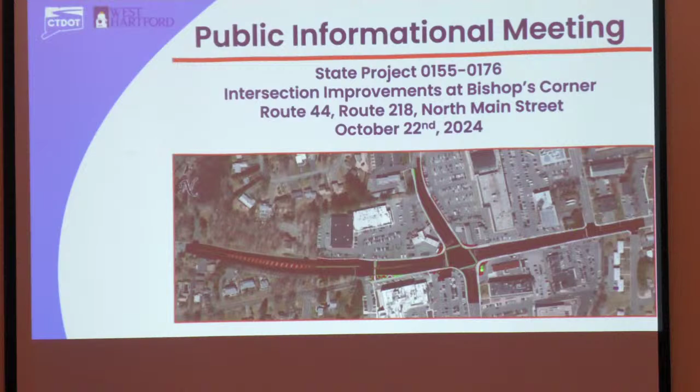Thanks for coming out this evening, everybody, to tonight's presentation for State Project 155-176, intersection improvements at Bishop's Corner. Excuse the adjustment here.

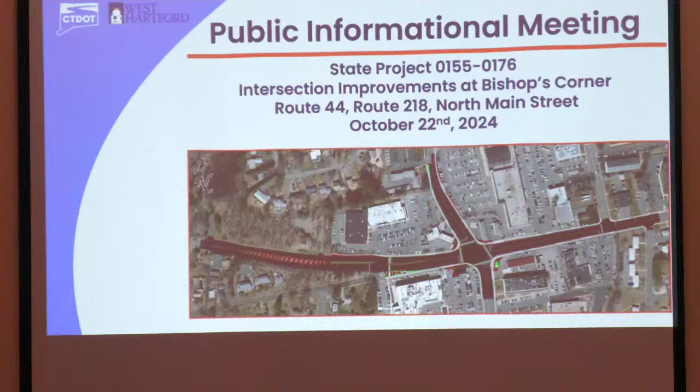My name is Andrew Esposito, I'm the project engineer for this job. With me tonight I have the project manager, Joe Arsenal, the project designer, Nick Willey, from our rights-of-way department, Matt Janatopoulos, from our traffic department I have Colin Bomber, Adler Phils, and Jinhao He, and from our landscape design unit I have Matt Berry back there as well. Maybe get an opportunity to talk with us all before this presentation, and we'll also have time to talk after.

Before I dive into the project presentation, get into the background and the proposed improvements, I just want to touch on the Connecticut Department of Transportation's Title VI Notice to the Public. The information you see on the screen is available in handouts in the back. We also have all this information available on our project website. The handouts have information on how to get to our project website, and I'll leave that information up on the screen again at the end of the presentation.

So, project location: we're at Bishop's Corner, the intersection of Route 44, Route 218, and North Main Street. North Main Street, south of the intersection, is a local road. You can also see Haynes Road that intersects North Main Street to the south, Flag Road and Skyview Drive that intersect Route 44, and Starkel, which intersects 44 and wraps around to 218.

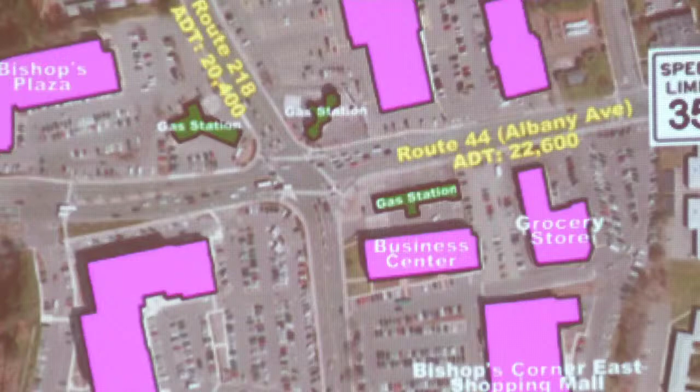This area is obviously very well developed. Three of the four corners of the intersection have gas stations on them, highlighted here in green. The buildings highlighted in purple are all the commercial and retail space with all the parking surrounding them. Each leg of the intersection has a posted speed limit of 35 miles an hour and an average daily traffic between 20,000 and 25,000 vehicles per day.

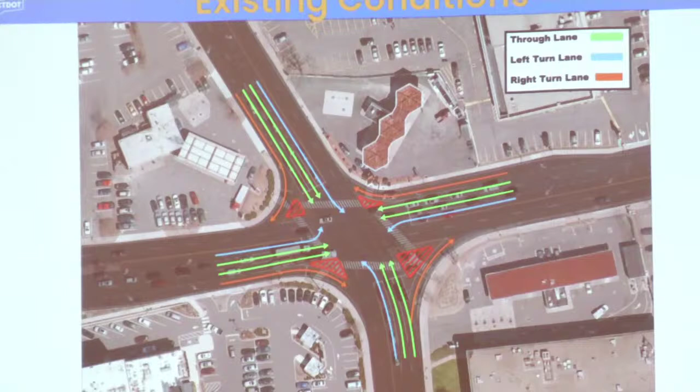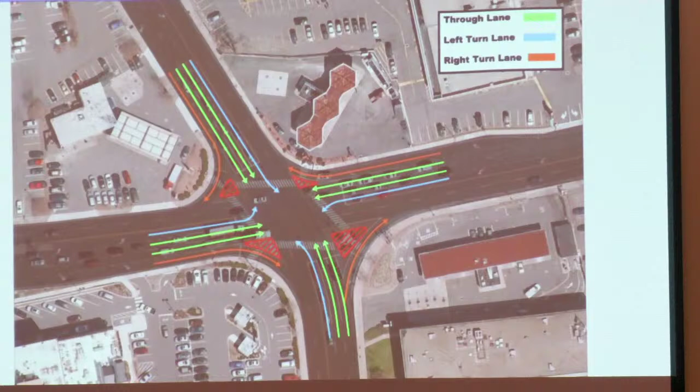So this is the existing lane configuration at the intersection. Each leg of the intersection has 2 through lanes, a dedicated left turn lane, and these channelized right turn lanes. Because we have these channelized right turn lanes, we have all these islands outlined here in red, which are a pretty big component for improving safety at this intersection.

Vehicles who use the channelized rights tend to use them at high speeds, with their main focus being looking at the upstream traffic or upstream vehicles that they need to yield to, which may leave pedestrians waiting to cross to or from these islands unnoticed.

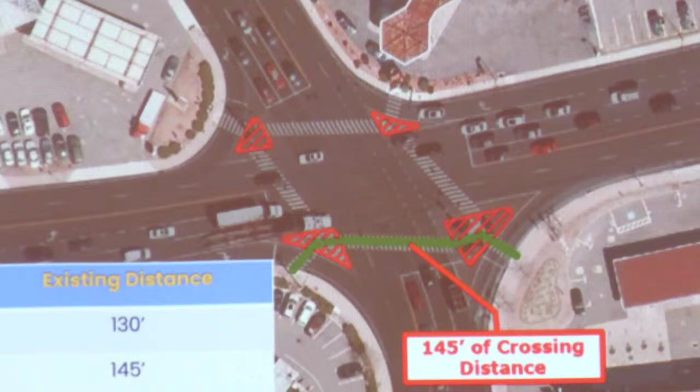So the signal at the intersection has a concurrent pedestrian crossing phase, and all that means is pedestrians, when they get their signal to cross, it's in the same direction and at the same time as vehicles traveling through the intersection. The push buttons to activate all of these signals are all located within these pedestrian islands. This kind of creates a lengthy multi-step crossing to get from one side of the road to the other.

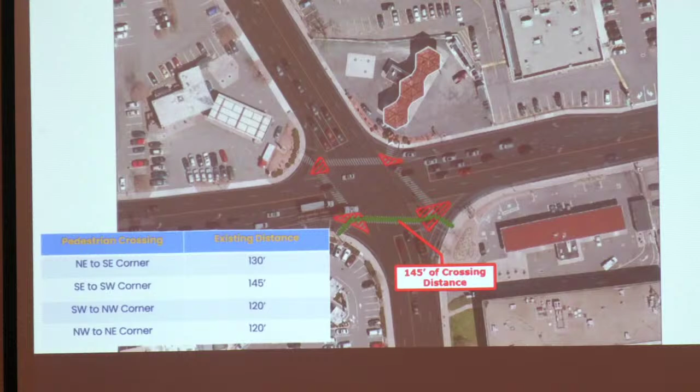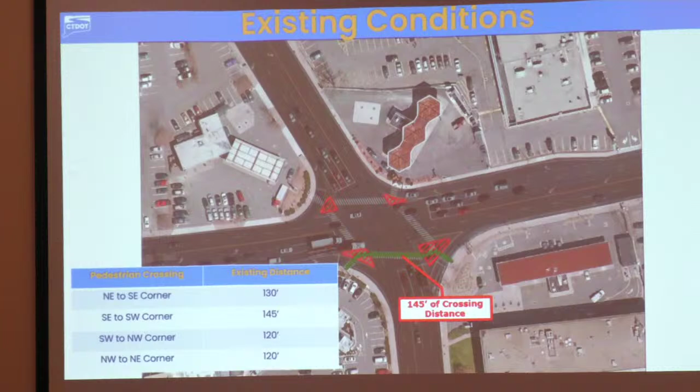The town has received complaints from pedestrians who use the intersection saying it's difficult and confusing, and vehicles often don't yield to them as they try to cross to these pedestrian islands. They've also complained about the condition of the islands. Pedestrians must wait on them surrounded by vehicles until they get their signal to walk.

These islands are subject to get hit by large turning vehicles. Not all the ramps are ADA compliant, and 2 of the 4 islands are mostly made up of asphalt, kind of causing them to blend in with the surrounding roadway.

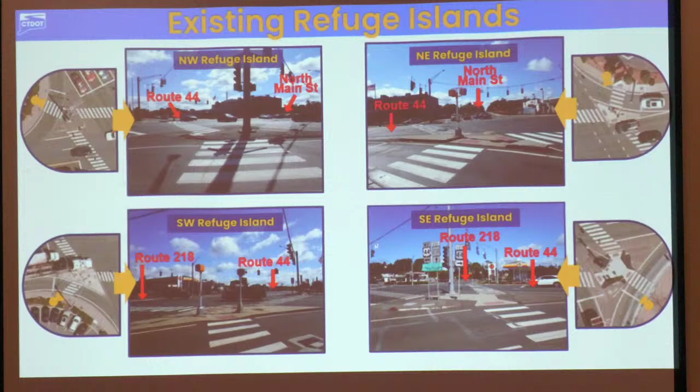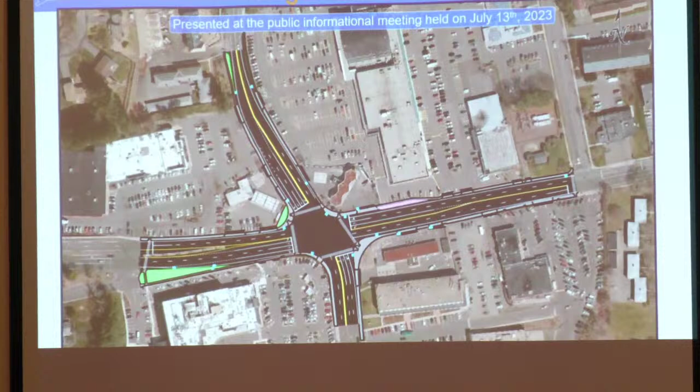So this was our original alternative concept and project limits for removing the channelized right turn lanes, with the goal being to improve pedestrian and intersection operations. By removing these pedestrian islands, we were able to normalize and shorten the total pedestrian crossing from one side of the road to the other.

We were also, by removing these channelized rights on the southbound leg and the eastbound leg, replacing the channelized rights with dedicated right turn lanes. On the northbound leg and the westbound leg, we were able to eliminate the channelized right turn lanes and combine those right turn movements with the through movements.

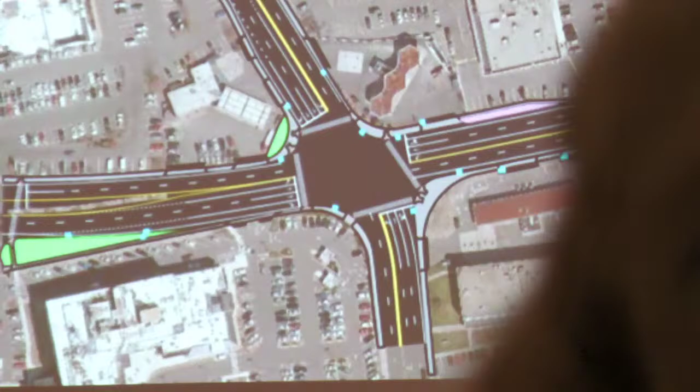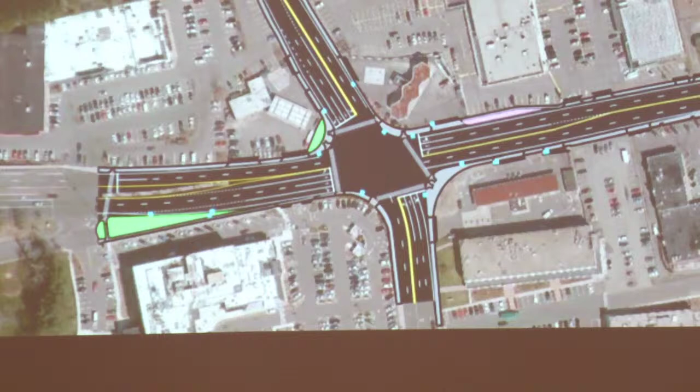We presented this alternative at a public informational meeting in July of 2023. The proposed improvements were pretty well received, but we did receive a lot of comments about the lack of bike facilities throughout the project limits, along with feedback discussing removing vehicle lanes in order to make room for more bike lanes or some type of bike facility.

This ultimately led us to go back to analyze more design alternatives to see if we could fit some type of bike lane while still improving the pedestrian and intersection operations at the site.

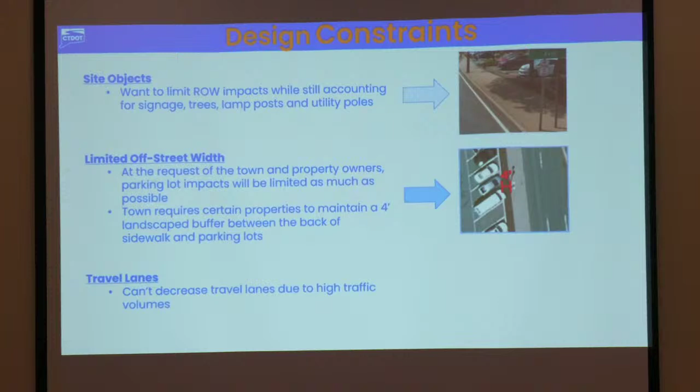So the first thing we had to do was look at a bunch of the constraints within the area. It's built up. We have a lot of roadside objects right outside our roadway cross-section, like utility poles, signs, lampposts, and trees that we would need to contend with. There's a lot of parking spaces out there, and we don't want to lose or change any parking spaces without the proper mitigation. We also don't want to put any of the adjacent properties out of compliance with any local zoning ordinances.

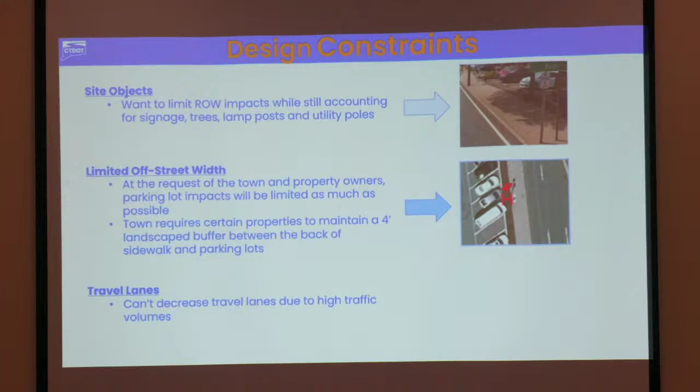As I mentioned before, we've got a lot of feedback about reducing the number of travel lanes. Given that each leg of this intersection sees between 20,000 and 25,000 vehicles per day, reducing the number of travel lanes out there is not a design alternative we can really recommend. However, our traffic unit did analyze a few different alternatives for what a lane reduction would look like.

The proposed layout on the left here shows the lane configuration I went over in the previous slide, where we removed the pedestrian islands, and for this eastbound and southbound leg, we replaced those channelized right turn lanes with dedicated right lanes. For the northbound and westbound, we eliminated the channelized right turn lanes and were able to combine those right turning movements with one of the through movements.

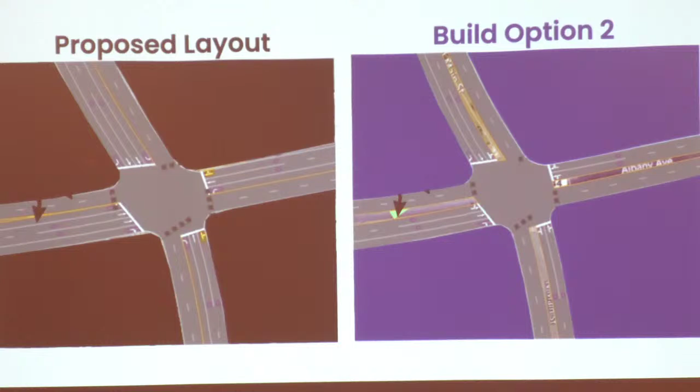Of all the alternatives traffic analyzed for reducing vehicle lanes beyond that, this was the alternative, build option 2, that produced the most efficient design in terms of congestion and delay. But it's still a 286% increase in delay time compared to our proposed layout.

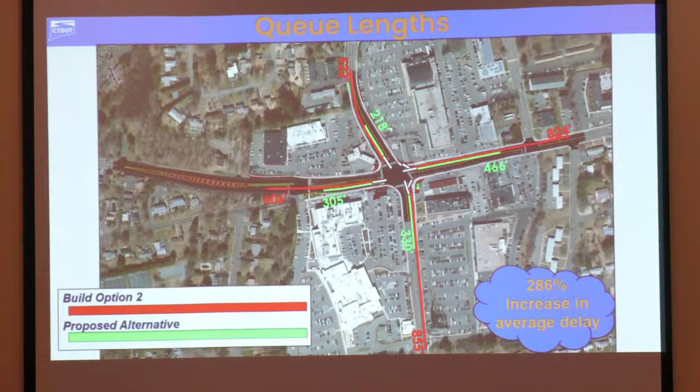This graphic here shows how far back vehicles would get backed up while waiting at the intersection. The green line is our proposed layout that I showed on the previous slide, and the red lines here show that build option 2 with that 286% increase in delay time.

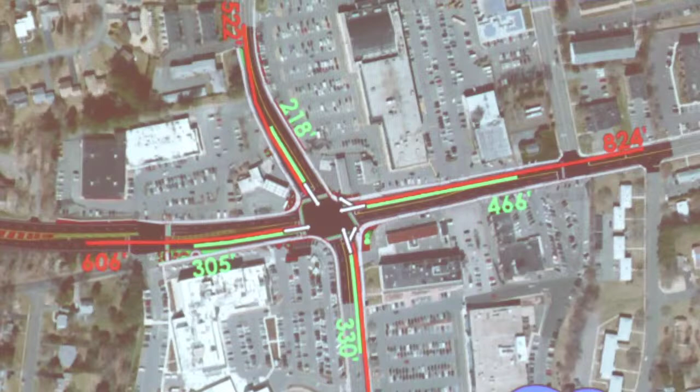Delay time is certainly something we try to avoid at all intersection design projects, but what's more concerning with build option 2 is that these legs back up into these next intersections downstream, which is a pretty significant decrease in safety and something that we're really trying to avoid.

So moving forward with build option 2 is not something we planned to do, and we looked at using our proposed alternative to try to incorporate some type of bike facility for this project.

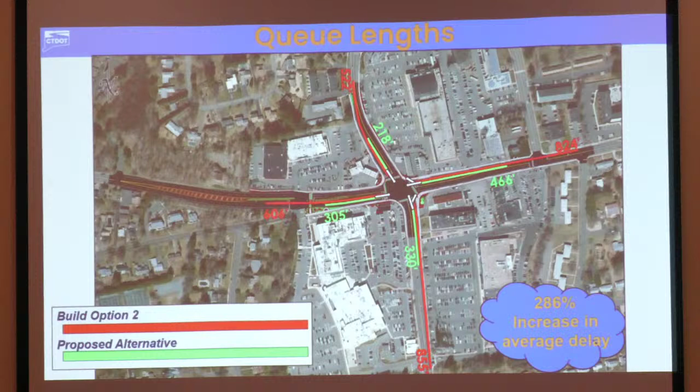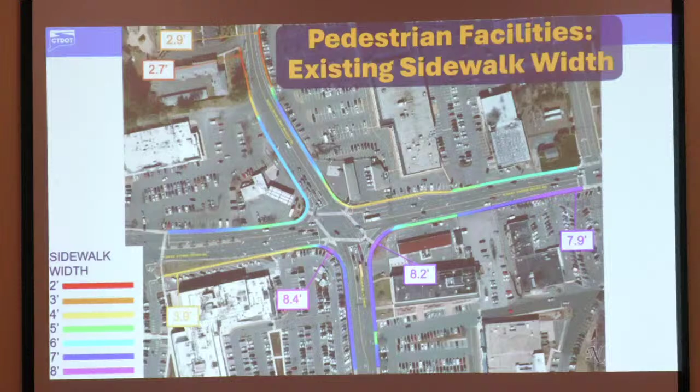So we looked at eating into sidewalk width. We do have pretty wide sidewalks out there today, mostly in the 4 to 7 foot range, even approaching 8 feet in a lot of areas. The problem with the sidewalk is there are a lot of objects in the sidewalk, reducing that effective width of the sidewalk.

So these are street level photos that are pretty representative of what you see on the sidewalk throughout the project limits. These top 2 photos show utility poles in the sidewalk, signs in the sidewalk, and lampposts and trees directly off the back of the sidewalk. This bottom right photo is showing a lamppost in the sidewalk, along with these 2 signs partially straddling the sidewalk, taking what's a pretty wide sidewalk and really reducing that usable space.

So if we were to utilize this area, we would need to relocate or remove these roadside objects so that they can still serve their purpose, but again, we would be able to utilize that space.

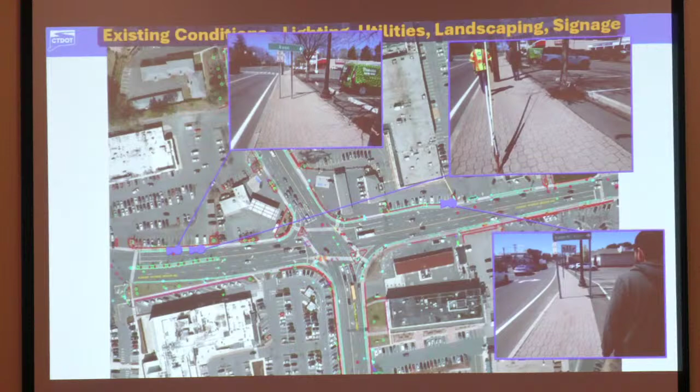So when we looked at all these different alternatives, we laid out a lot of different designs to incorporate some type of bike facility, but to best meet the needs of pedestrians and cyclists in the area while having minimal parking and right-of-way impacts. We are proposing to take the existing sidewalk and convert it into an 8 foot side path that we would delineate half for bikes and half for pedestrians. And that's the design that Nick is going to walk through.

So as Andrew just mentioned, the proposed design for this intersection for the off-street facilities will be a 2 foot buffer along with an 8 foot side path. As you can see up here, 4 feet of the side path will be delineated as a pedestrian lane, basically just a sidewalk, and 4 feet will be delineated for a bike lane.

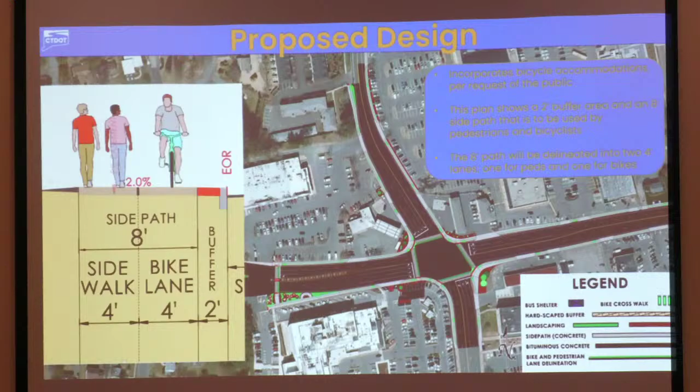Now walking through typical cross sections of North Main Street and Route 44. First for North Main Street, we will have 11 foot travel lanes, 10 foot turn lanes, 1 foot minimum shoulders, and then for the off-street facilities, the 2 foot buffer along with the 8 foot side path. One note about the buffer and the side path is that it will be elevated above the roadway grade, to offer maximum separation between pedestrians and the heavy volumes of vehicular traffic at the intersection.

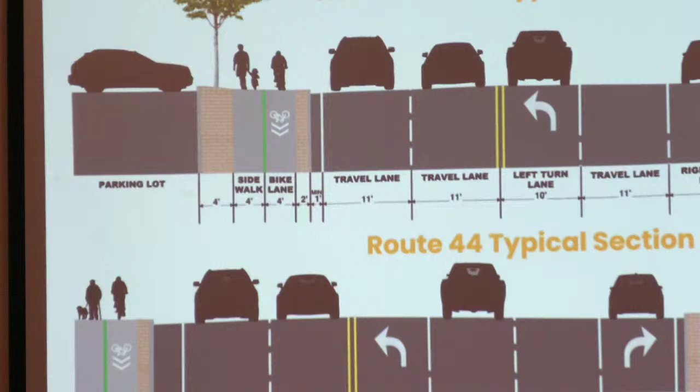Another note here for North Main Street is that anytime there is parking, as seen over here, there will be some type of buffer between the back of the side path and the start of the parking. This is just to offer protection from overhanging vehicles into the side path to maintain the 8 foot width of the side path. We have more of the same on Route 44.

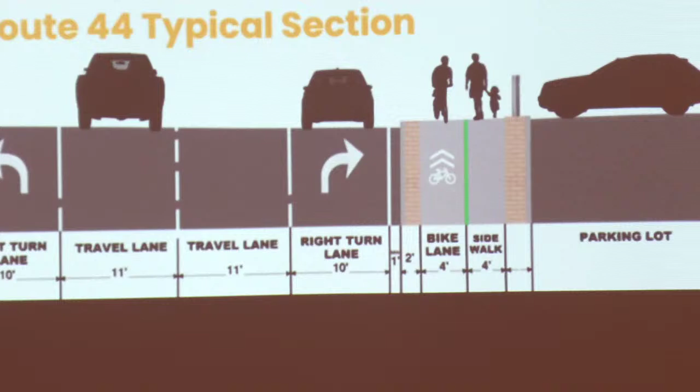Again, we have 11 foot travel lanes, 10 foot turn lanes, and 1 foot minimum shoulders, and the off-street facilities are a 2 foot buffer with an 8 foot side path that is again raised above the roadway. And if there is parking, there will be some type of buffer or shield between the back of the side path and said parking.

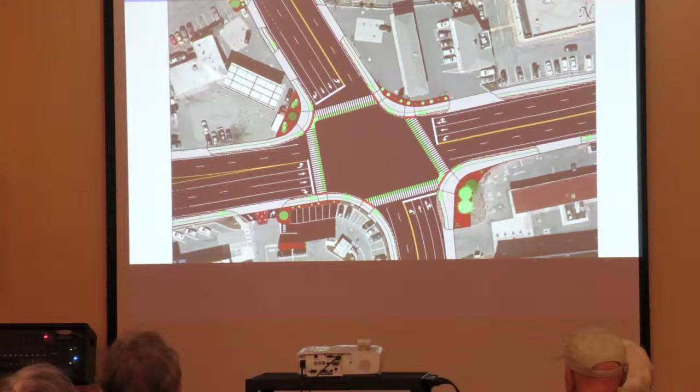The pedestrian lane will also have painted pedestrian markings that will be bidirectional, and the bike lane will have painted bike markings that will be unidirectional, so the bike lanes will only be one way. As for the buffer, it will be a different material that is rougher and more texturized. This is just to deter bicyclists from riding on or near the buffer, to keep them as far away from the road as possible to increase pedestrian safety.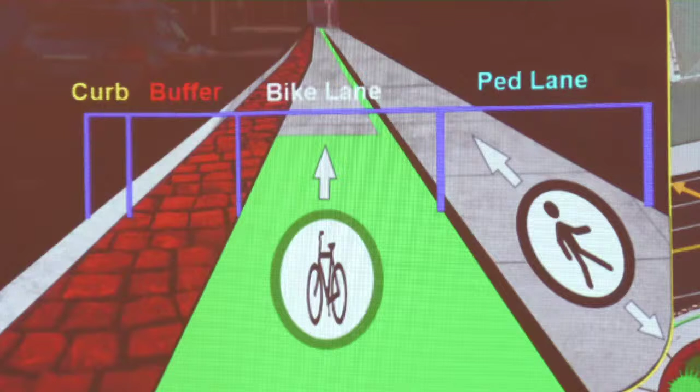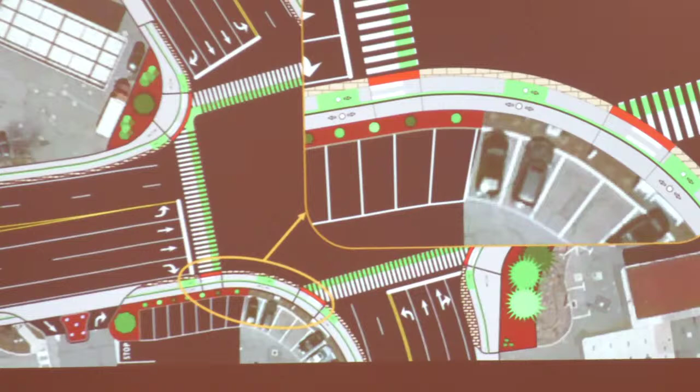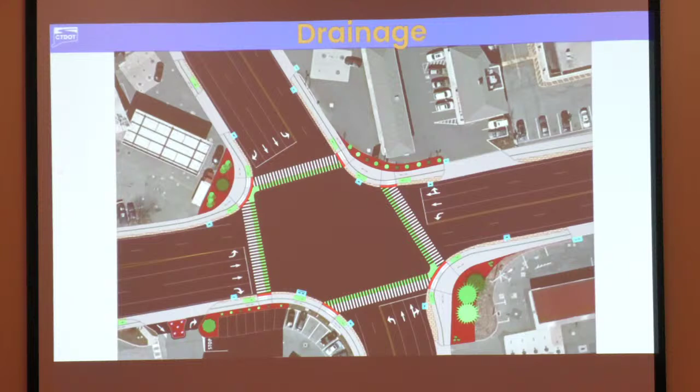We will be running a full drainage analysis on the existing system and making upgrades where needed based on that analysis. So drainage improvements will be incorporated in this project as well.

For the lane configuration, this is the existing lane configuration where we have on all approaches a dedicated left turn lane, two dedicated through lanes, and a dedicated right lane that also acts as a channelized right lane.

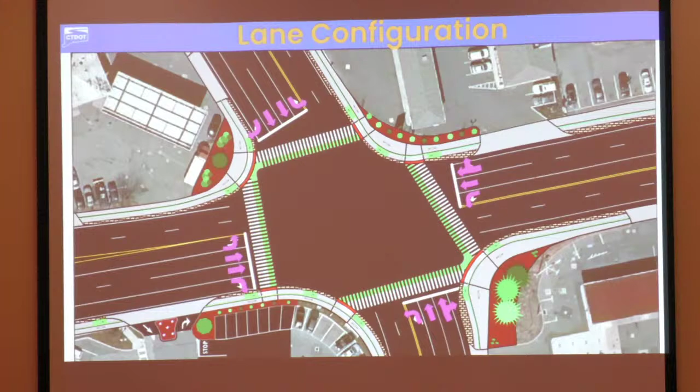For the proposed lane configuration, the southbound and eastbound approaches will have a dedicated left turn lane, two dedicated through lanes, and a dedicated right lane. These dedicated right turn lanes will not be channelized.

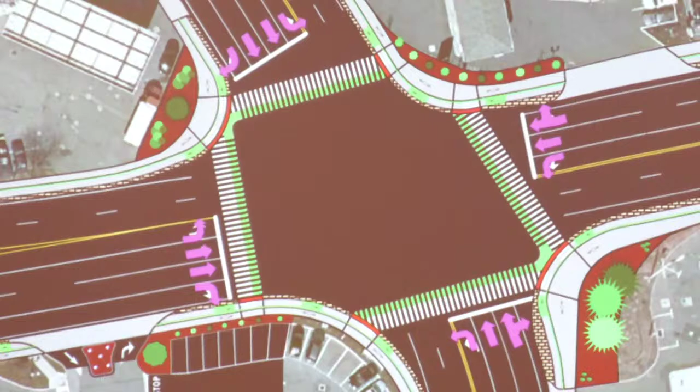For the northbound and westbound approaches, there will be a dedicated left turn lane, a dedicated through lane, and a combined through and right turn lane. This is one lane less than the current configuration, as one of the dedicated right turn lanes and one of the through lanes were combined, reducing from 4 lanes to 3 lanes. This does not increase delay for traffic significantly, so that was something we were able to do here.

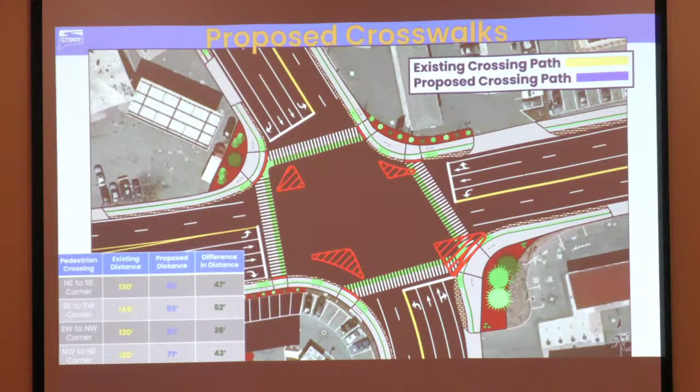For the proposed crosswalks, I first want to give some context. These red markings represent the existing pedestrian refuge islands that are out there today, and they're overlaid over the proposed layout here in the background.

I want to walk through an existing crossing path versus a proposed crossing path, and I'll do that for the crossing paths across the south leg of the intersection.

In an existing crossing path, the pedestrian would start at the existing sidewalk, cross the channelized right turn lane into the pedestrian refuge island. This is an unsignalized crossing, and then the pedestrian would hit the pedestrian push button, wait for the walk signal, and cross all the way to the other pedestrian refuge island, where they would then have to wait to cross another channelized right turn lane, again an unsignalized crossing. This total crossing distance amounts to 145 feet, which is pretty lengthy, and it's also a multi-step crossing path.

This is one of the main reasons the project was initiated. These multi-step crossings are pretty dangerous for pedestrians, especially considering that 2 of the 3 crossings are unsignalized, in a location where drivers aren't really yielding to pedestrians and are just focused on finding a gap in traffic. So the main idea for this project was to normalize these crossings into one crossing movement.

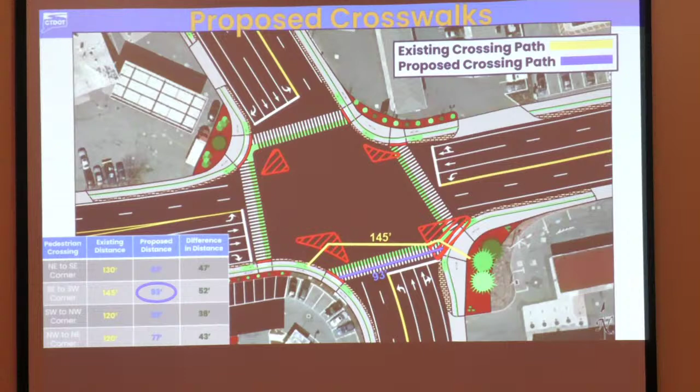That's exactly what we've done. For the proposed crossing path, the pedestrian would simply hit the pedestrian push button, located right behind the side path, and then cross in one maneuver all the way across to the other side of the road. This total crossing distance amounts to only 93 feet, a 52-foot reduction.

For all of the other legs, each existing crossing path compared to its corresponding proposed crossing path is at least 38 feet longer in total crossing distance, which is significantly larger than the proposed alternative. With the decrease in crossing distance comes an increase in pedestrian safety, and that's one of the main reasons this project is happening.

As for the signal phasing, we will be doing concurrent phasing at the intersection. Essentially, whenever cars have a green light, any crosswalks parallel to the cars moving through the intersection will have a walk signal activated for pedestrians at the same time the light is green. We are adding some safety measures to go along with the concurrent phasing.

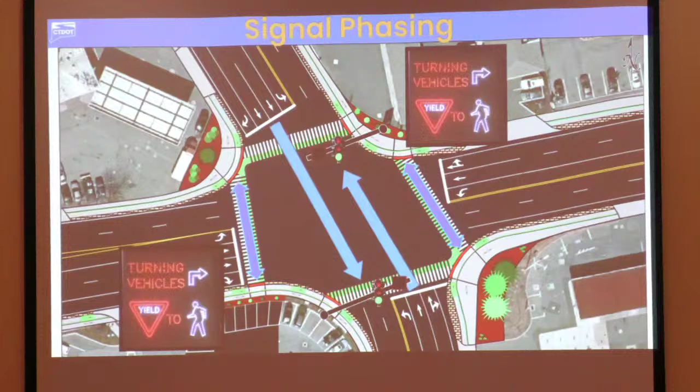These are what we like to call yield to pedestrian signs, shown up here, where anytime there is a pedestrian walk signal activated, these signs will light up, telling turning vehicles to yield to pedestrians that will be in the crosswalk.

Another added safety measure we are including here at the intersection are LPIs, or lead pedestrian intervals. Essentially, LPIs give pedestrians a head start in the phasing, so the pedestrian will get their walk signal a few seconds before the concurrent cars get their green light. In this animation, the pedestrian gets their walk signal and starts walking, then a few seconds later the cars get their green light. Since the pedestrian has established their presence in the crosswalk, cars are more able to see them and hopefully yield to them better.

So that's just another safety measure we're adding here along with the concurrent phasing.

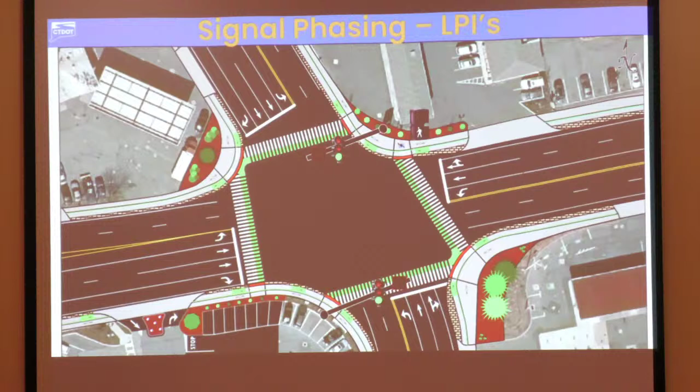For the project limits: first, for the north leg of the intersection, we are extending the side paths and the project limits up to the driveway at Big Y on the northbound side of Route 218.

For the east leg of the project, we are extending the project limits all the way out to Sky View Drive, as shown here.

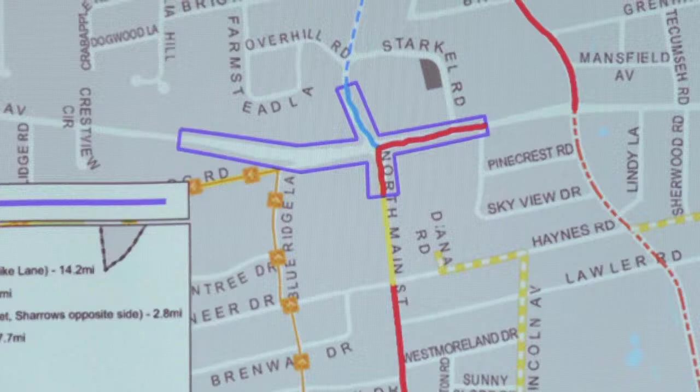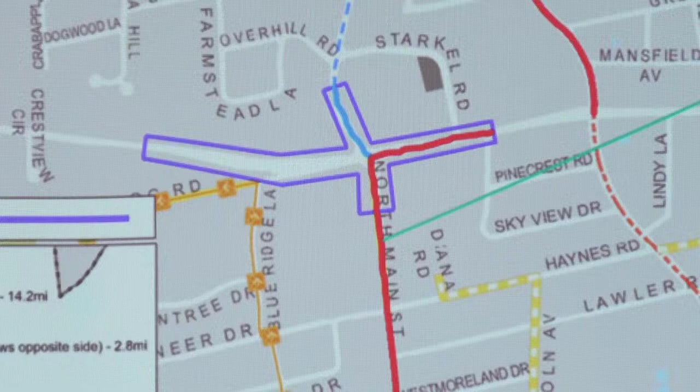For the south leg of the intersection, we are bringing the project limits and side paths to currently end just south of the intersection on North Main Street. We have considered extending these side paths all the way down to Haynes Road to connect into the bike lane system on North Main Street that starts at Haynes Road, as shown here. However, we are unsure if we can do that at this time. The off-street width in this segment of North Main Street, between our project limits and Haynes Road, is only 12 to 13 feet wide.

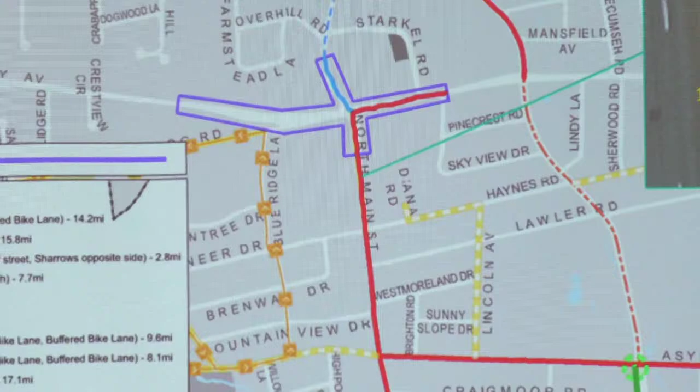In order to fit our cross-section in this space, we need our 8-foot side path and a 2-foot buffer, which is 10 feet, plus a 4-foot landscape buffer required by the town on these properties. We have reached out to the town and have not heard back yet on whether we can eat into those buffers. If we can, we will heavily consider extending the bike lanes all the way down to Haynes Road to tie into this existing bike lane system here.

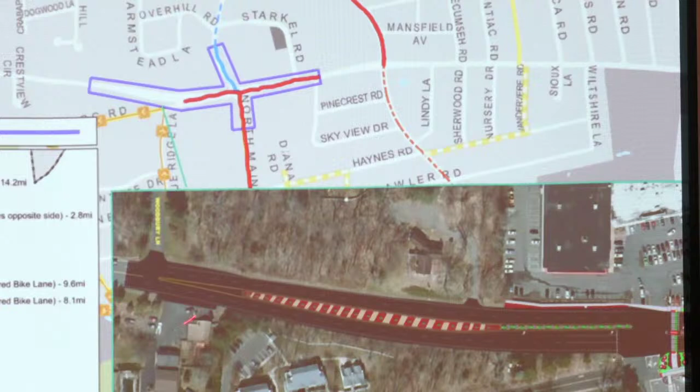Finally, for the west leg of the intersection, we are extending the side paths all the way out to the intersection of Route 44 and Flagg Road. However, we are extending the project limits even further west, to just west of Woodbury Lane, so that we can incorporate this big median here into the project. I'll get into that a little bit later.

I know you can't really see this very well, but this is the bicycle network map of West Hartford, showing the existing and proposed bike facilities in the town. This map helped us determine logical endpoints for the side path and where we wanted to tie our bike facilities into the existing network.

First, for the west leg of the intersection, our idea was to tie into the Flagg Road sharrow system, represented by this yellow line here. For those who don't know, a sharrow is just a pavement marking you find on a roadway with a bike and two carrots over the top. It means bicyclists are able to share the lane or road with drivers, and it's alerting drivers to this fact.

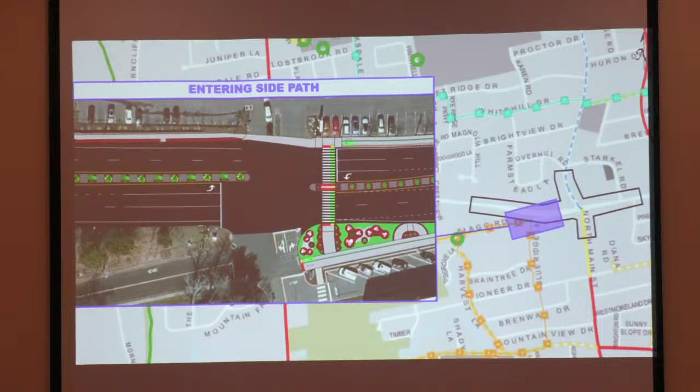For tying into the sharrow system: entering our side path from the existing sharrow system at Flagg Road, bicyclists would start on Flagg Road heading eastbound, continue across the intersection of Route 44 and Flagg, and then ramp up into the side path. From there they have two options: continue straight down towards the intersection, or take a left, cross the bike crosswalk, and enter the Staples Plaza if they so please.

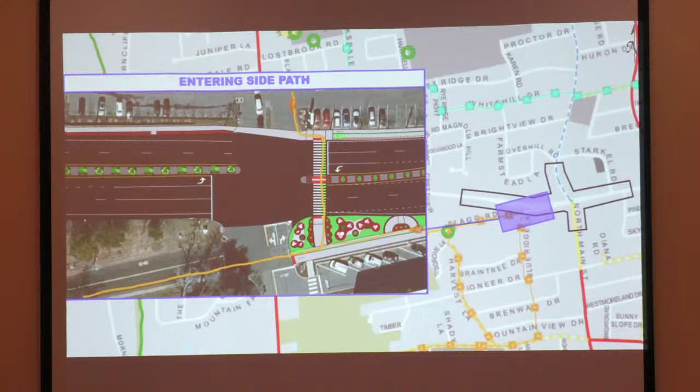Another added note here is that bicyclists approaching the intersection of Route 44 and Flagg from Route 44 may also enter the side path the same way using this bike ramp, or they may cross the intersection and enter the side path using this bike ramp here as well.

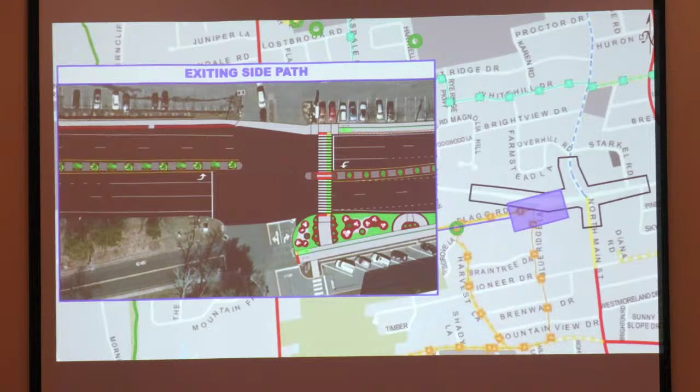For exiting the side path from the west leg of the intersection, bicyclists would be on the north side of Route 44 heading westbound. In order to tie into the Flagg Road sharrow system, they would take a left and cross the bike crosswalk onto the other side's side path, then simply ramp back down into the intersection of Route 44 and Flagg, continuing westbound down the sharrow system that currently exists on Flagg.

Your map doesn't show Woodbury on here. Oh, back here? Yeah, Woodbury is a little bit further down, at the end of the median, past this down here. So it's just a little bit further down. It's not shown on this map.

For the east leg of the intersection, the idea was to tie into this proposed bike lane system on Trout Brook Drive. The best way we saw fit to do that was to tie our side path into Sky View Drive, giving bicyclists an easy residential road with low traffic volumes to ride down in order to tie into this bike lane system.

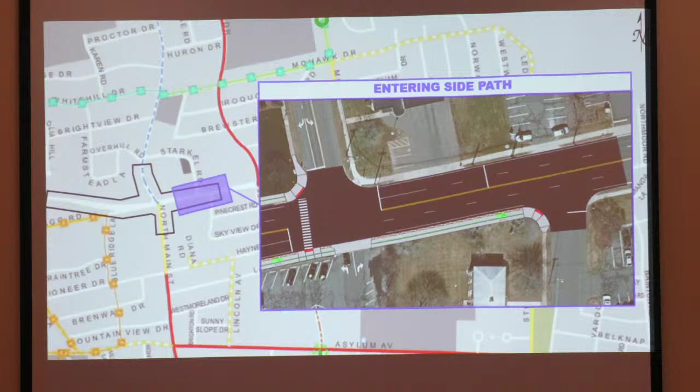For entering the side path from the east leg of the intersection, bicyclists heading westbound on the north side of Route 44, or southbound on Starkel, would have two options: either cross the intersection of Starkel and Route 44 and ramp up onto the side path, or head southbound on Starkel and tie directly into the side path, as shown in the animation.

For exiting the side path on the east leg of the intersection, bicyclists would again have two options. They may continue eastbound on the south side of Route 44, cross the intersection of Skyview and Route 44 and continue eastbound, or they may take a right either into the sidewalk or onto the road of Sky View Drive and connect into Trout Brook Drive that way.

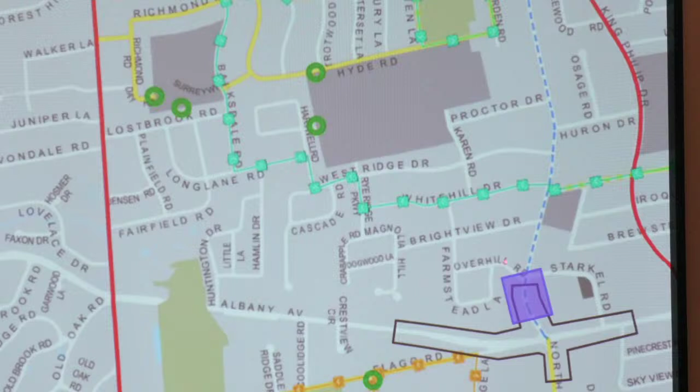For the north leg of the intersection, the idea was to tie into the proposed bike lane system on Route 218, represented by this blue dashed line. The best way we saw fit to do that was to end our side path at the nearest driveway, so that when a new project comes through, they could easily end their bike lane or side path right at the other side of the driveway, creating a seamless connection between the two bike lane projects.

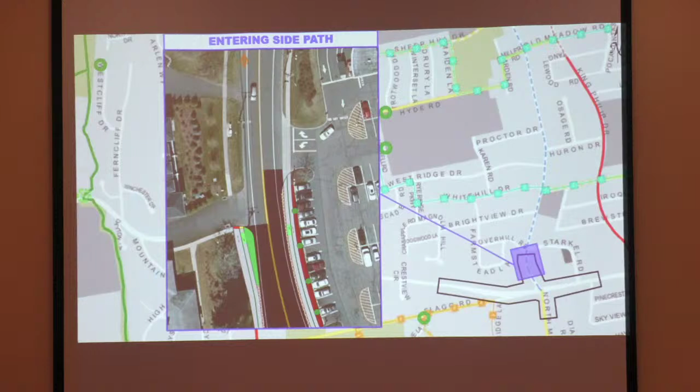For entering the side path from the north leg of the intersection, bicyclists heading southbound would either be coming from the shoulder or the sidewalk, and they would simply ramp down into the side path, as shown in the animation.

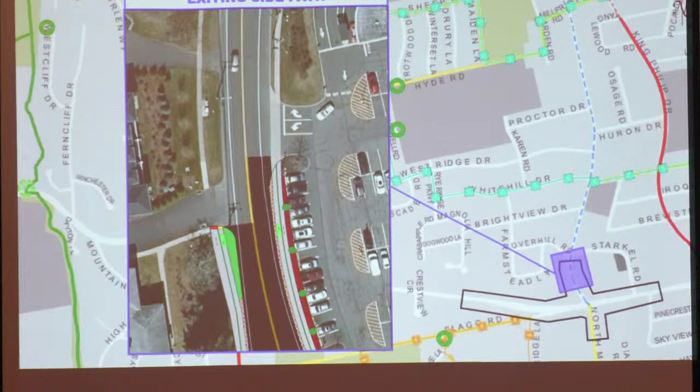For exiting the side path on the north leg of the intersection, bicyclists would head northbound up the side path bike lane and have two options: either ramp back into the shoulder or continue on the sidewalk. One thing to note is the shoulder is 7 to 9 feet wide, which is pretty wide and enough for a bicycle to feel comfortable riding in it.

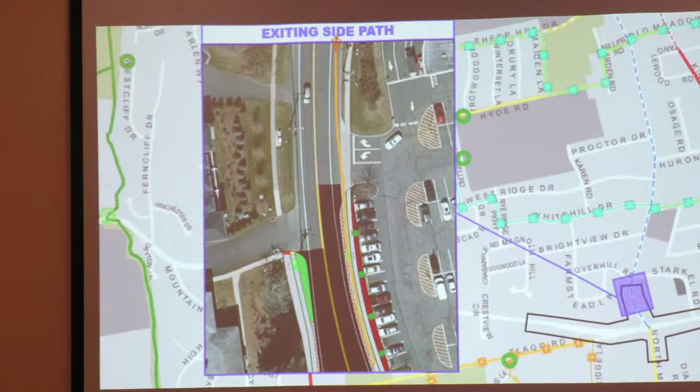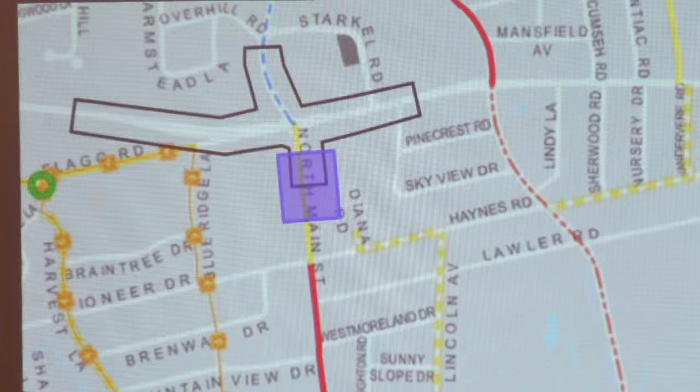Finally, for the south leg of the intersection, the original idea was to tie into the bike lane system on North Main Street that starts at Haynes Road. However, we were unsure if we could do that, so we are proposing to tie our side path into the existing Sharrow system on North Main Street, represented by this yellow line.

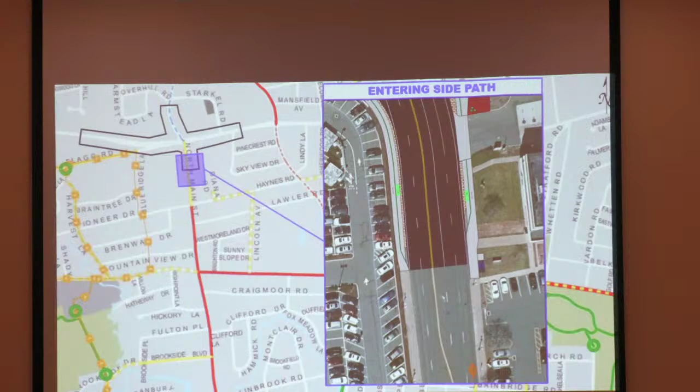We wanted to do that by using bike ramps that ramp up and down from the side path. So for a bicyclist entering the side path from the south leg of the intersection, they would simply head up the Sharrow system heading northbound, ramp up into the side path, and then continue northbound towards the intersection.

Similarly, bicyclists exiting the side path from the south leg of the intersection would head southbound in the side path and then ramp down from the side path back into the Sharrow system in the roadway.

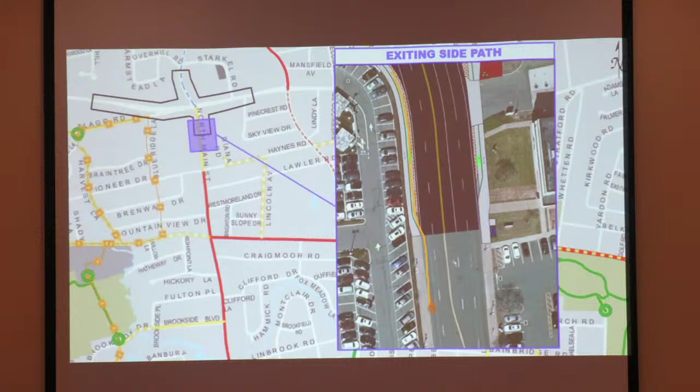There are lots of signs, 28 to be exact, that in their current locations conflict with the proposed 8-foot side path, so those signs will either need to be relocated or even removed, if possible, outside of the side path so that an 8-foot effective width can be maintained for bikes and pedestrians. We are working with our traffic design unit to achieve this and make sure all the signs are relocated outside of the side path. We are also investigating if some signs are unnecessary and can be removed to avoid sign pollution at this intersection as well.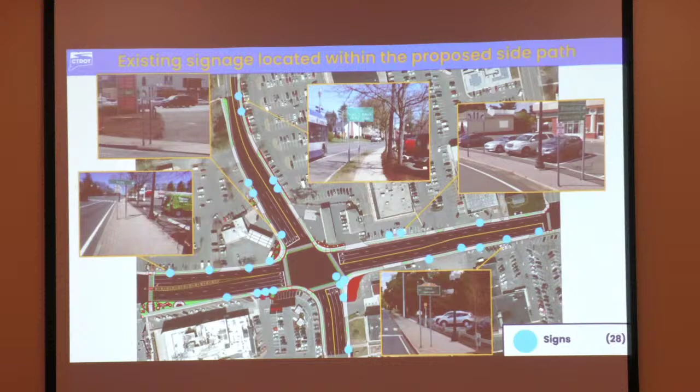We have other site objects located within the proposed side path, including lampposts and utility poles that will have to be relocated outside of it. We have unfortunately identified 20 trees that conflict with the proposed side path in their current locations and will have to be removed, simply because there's no space to put them back behind the side path.

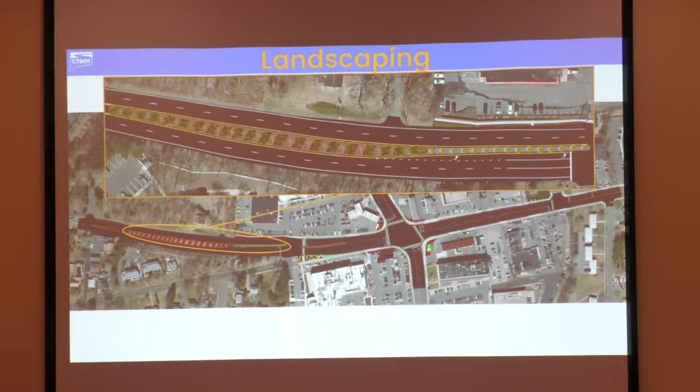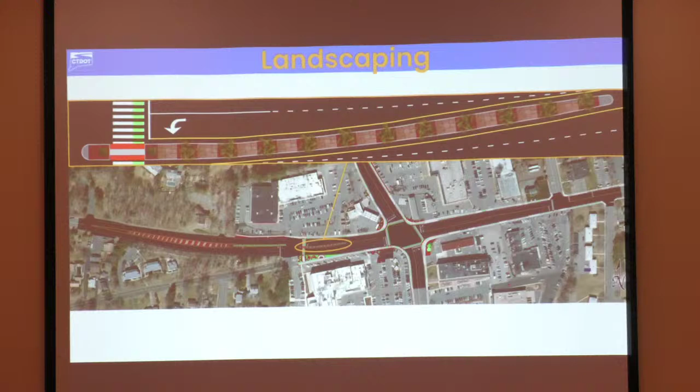We are also working with our landscape design unit to potentially upgrade the plantings in the median on the west leg of the intersection. So this median will also be incorporated into the project.

We have a big buffer space on the west leg of the project as well. We currently show it as grass in this graphic, but we are working with our landscaping design unit to come up with ideas for plantings there. It's a pretty large space, and we think it'd be a great opportunity to put some trees or other plantings in this area.

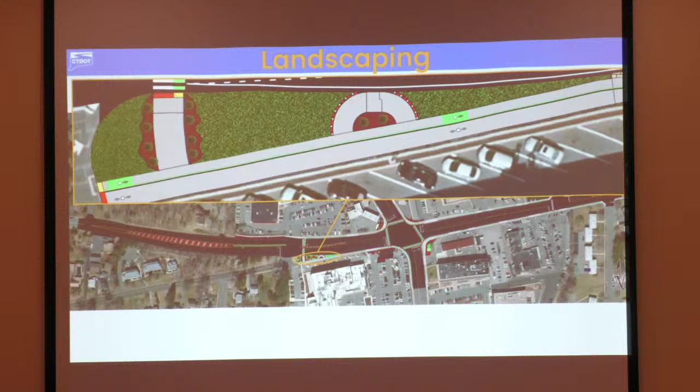Finally, we have garden beds on all 4 corners of the intersection. These beds are partially located on state right-of-way and partially on private property. We will be redoing the entirety of these beds as part of the project to keep them consistent, coordinating with all the right-of-way and property owners impacted by the work. We'll be able to put some plantings within state right-of-way on these garden beds, adding more greenery to the intersection.

For bus stops, there are 5 bus stops located within or just outside the project limits. We have worked with our transit unit to come up with new proposed locations, shown here. There are also a few new bus facilities our transit unit has proposed, which I'll get into in a second—but I'd like to point out that there is a new bus stop being proposed right in front of the Starbucks.

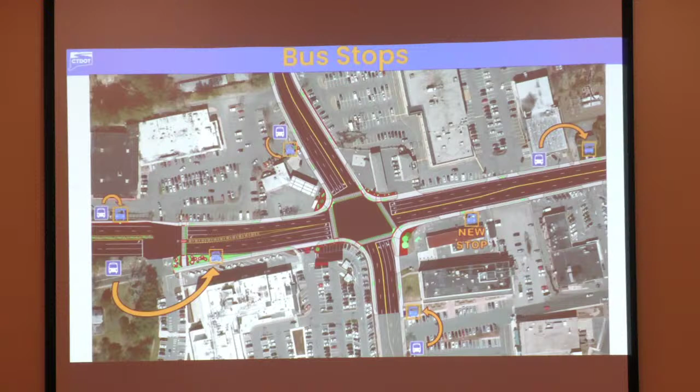For rights-of-way impacts, this project's impacts will be relatively minor. These are what we like to call sliver acquisitions, where just a narrow strip of the property frontage is acquired by the state so that state facilities can fit entirely within the state right-of-way.

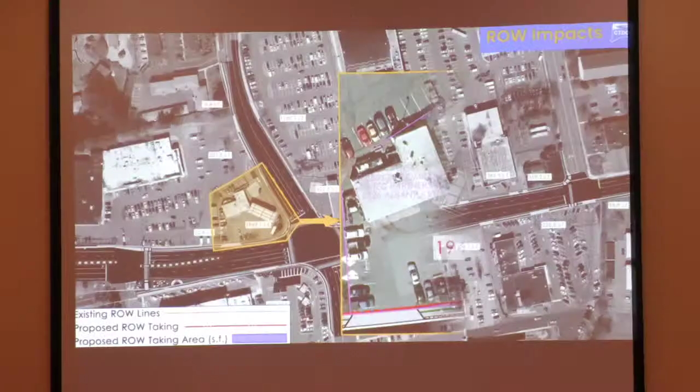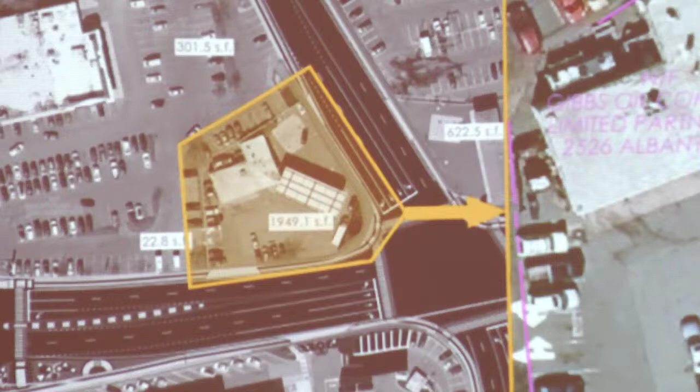As a quick example, this is the biggest sliver acquisition on the project, at the Phillips 66 gas station property. As you can see, just a narrow strip of the property's frontage is being acquired by the state so that the entire side path can fit within the state right-of-way. None of these sliver acquisitions will affect any vehicle's ability to get into a property, so just keep that in mind.

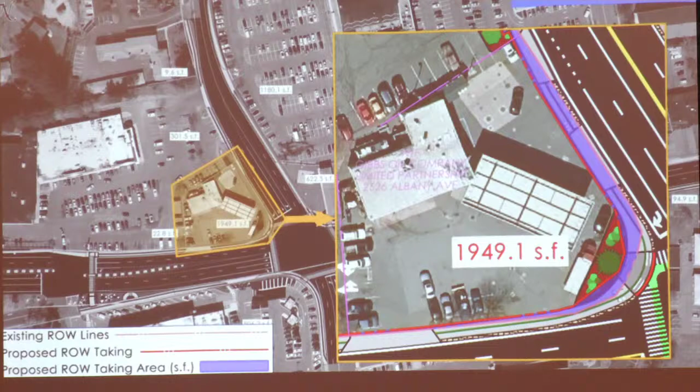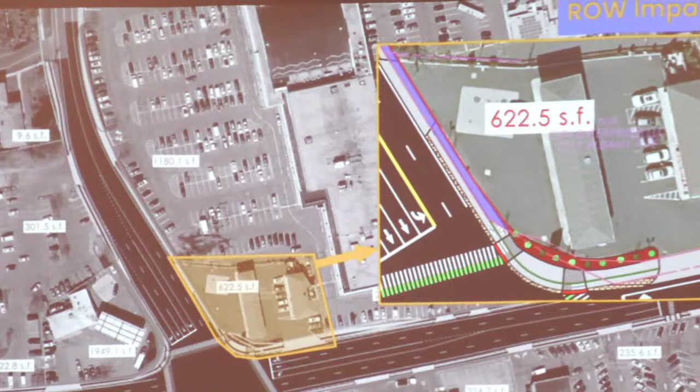Another quick example of a sliver acquisition is here on the Mobil property—this one's even more minor, just a very slight acquisition of existing right-of-way. A third and final example is a very, very minor sliver acquisition on the Shell gas station property. Now I'll pass it over to Matt to talk a little more about the department's rights-of-way process.

Thank you, Nick. I'm Matt Giannakopoulos, a project coordinator with the department's Division of Rights-of-Way.

As Nick just outlined, the proposed project design does have some right-of-way impacts, which is another way of saying that the proposed design would require the acquisition of property rights from some of the adjacent landowners. I'm here tonight to give a brief overview of the department's property right acquisition process.

All property rights required for the project will be acquired in accordance with Connecticut General Statutes Sections 13A-73, 13A-98E, and whenever there is federal money used in any phase of a project, the department must adhere to the Uniform Relocation Assistance and Real Property Acquisition Policies Act of 1970.

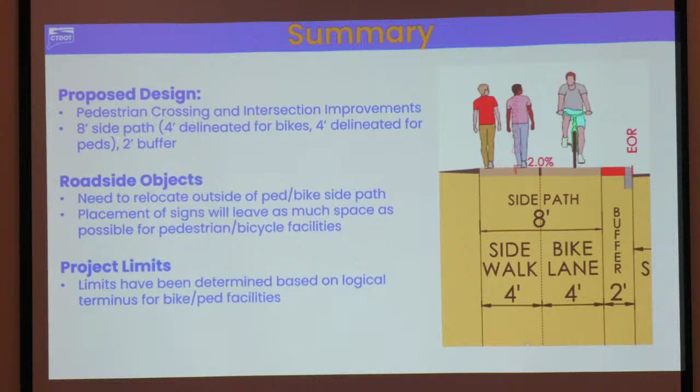Once the design is further along and we know exactly the limits of any property rights needed for the project, and we're ready to begin the acquisition process, each impacted landowner will receive a letter from our office along with a property map that depicts the exact rights to be acquired.

At that point, our office ascertains the fair market value of those property rights, and we use that to establish an offer of just compensation. That offer gets sent out to the property owner in writing, and a right-of-way agent from our office is available to meet with the property owner and explain in detail the project, the impacts to that particular property, and how the department came up with that offer.

The property owner would have a reasonable time to consider the offer and enter into negotiations. Once an agreement is reached, the DOT prepares all the necessary paperwork to transfer those property rights to the department, and they'll file the deed and the property map on the town land records.

If negotiations reach an impasse, in order to allow the project to move forward, the department may acquire the rights it needs through its power of eminent domain. What happens in that event is the department files a notice in the local superior court along with a monetary deposit in the amount of that offer of just compensation.

The property owner would have 6 months from that date to file an appeal if they thought the offer was inadequate. Whether or not the owner chooses to use their right to appeal, they can apply to the court to withdraw that money at any time.

I know a lot of times people hear eminent domain and think the state can just take a whole property for $1, but the owners would be entitled to at least that offer of just compensation, and the department would only take title to the property rights it needs to allow the project to move forward. So that's my brief overview.

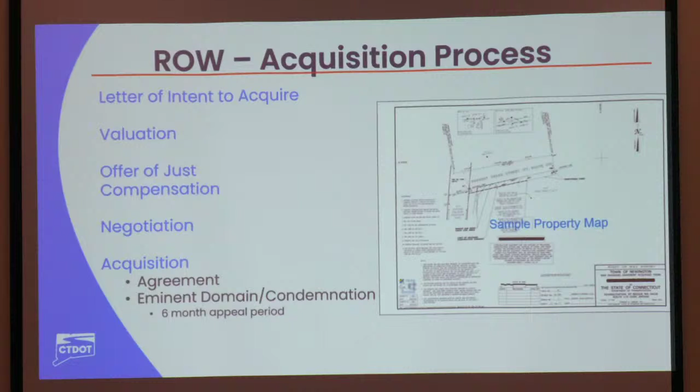All right, thank you, Matt. Just want to give a quick summary as we wrap up this presentation. This project was initiated with the goal of improving pedestrian and intersection operations.

We are removing the channelized right turn lane so that we can shorten those total pedestrian crossings from one side of the road to the other. We are also upgrading the signals at the intersection, both the traffic and the pedestrian signals. We're also incorporating additional pedestrian safety features like the illuminated yield to pedestrian signage and the lead pedestrian intervals.

That's all proposed work that we went over in our July 2023 public info meeting. And since then, we've gone back and added the 8-foot side path, which we think is a great alternative to give bikes a dedicated space while organizing the mixed use on this side path.

A big component of getting that side path to fit in the existing sidewalk footprint was relocating and removing signage and other roadside objects. We also extended the project limits to provide logical ending points or tie-in points for that side path that Nick went over for each leg of the intersection. This also provided more opportunities to convert empty space into landscaped areas.